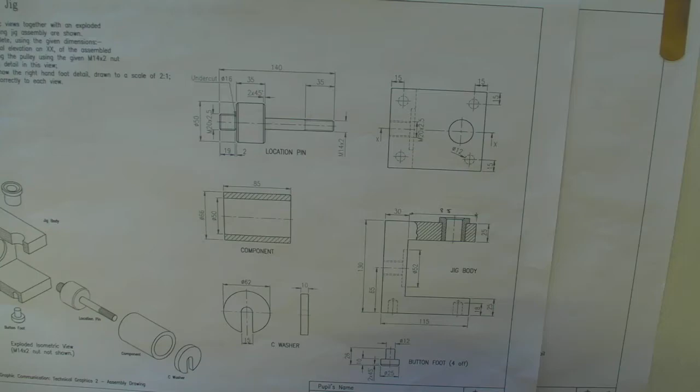Okay, B6, which is the drilling jig assembly. It's an assembly. We've got the washer, then we've got the component, the location pin, and that all fits inside the jig body. I'm going to start off by drawing, and I know it's a section, it's a sectional view

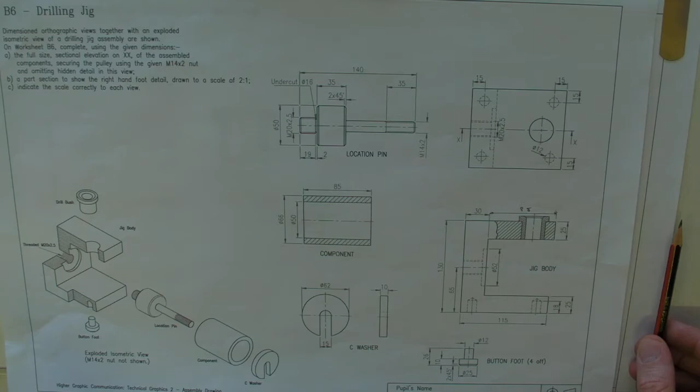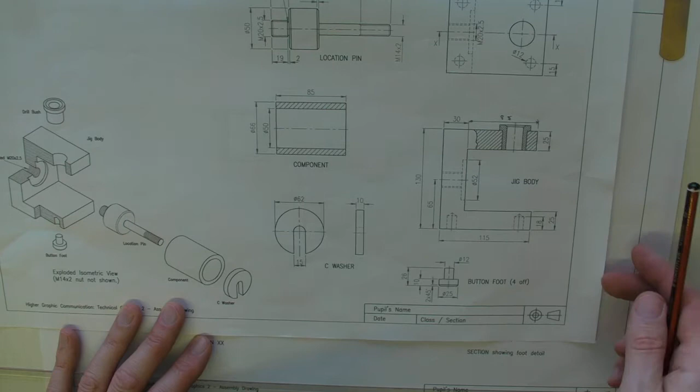Along XX, so we've got part of it been cut out. You can see the sectional information is here, so it's cut out across the top there. Okay, so we're going to be losing, basically slice right down the middle, but to be honest, when you're doing an assembly, the first thing to do really is do the assembly and then worry about the sectioning, because the shapes and everything are going to be pretty much the same.

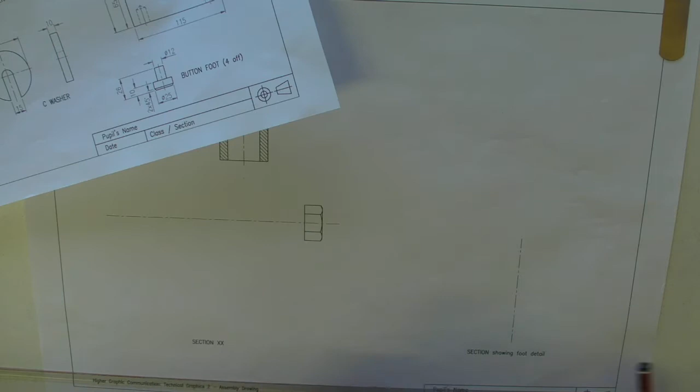Okay, so I'm going to start off, the best way of doing this is starting off at the nut here, starting with the washer. Everything's going to be centred around the centre line here. Now it says here that the washer's 10 wide, it's got a diameter of 62.

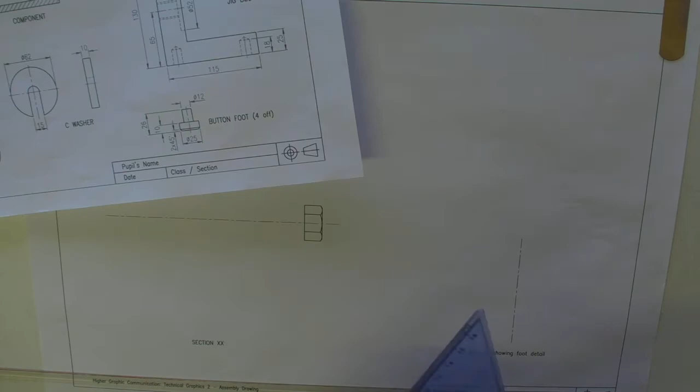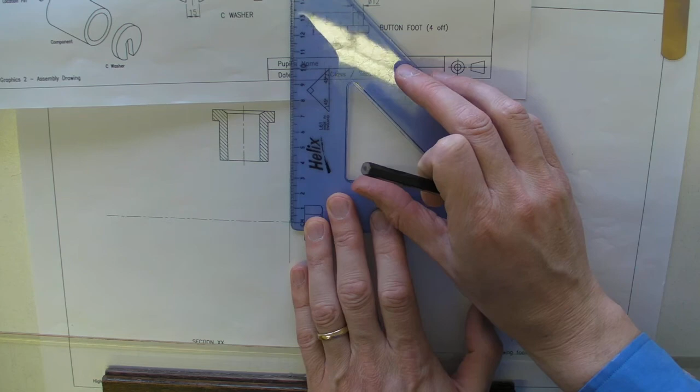Okay, so I'm just going to measure 10 along the line, mark a point here, and then project up from that. It's 62 in diameter, so that means that we're going to go up half of that, 31 on either side, so it goes up to there and then down to there. Okay, so just drawing the washer.

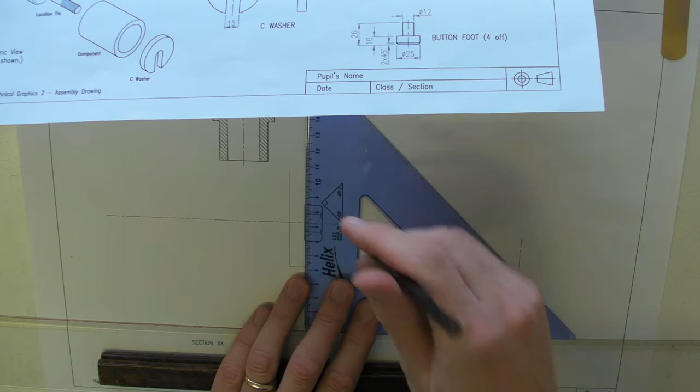As I said before, don't worry at this stage about hatching or anything like that, because I'm really not worrying about that too much. I'm just going to knock off these wee lines at the top here. I wouldn't normally do that, but I'm just going to do it just now to keep it tidy.

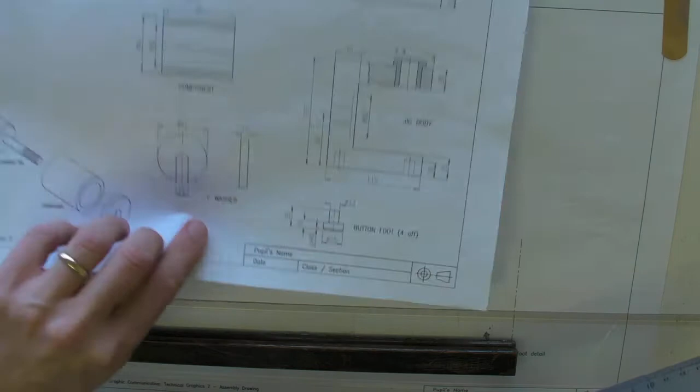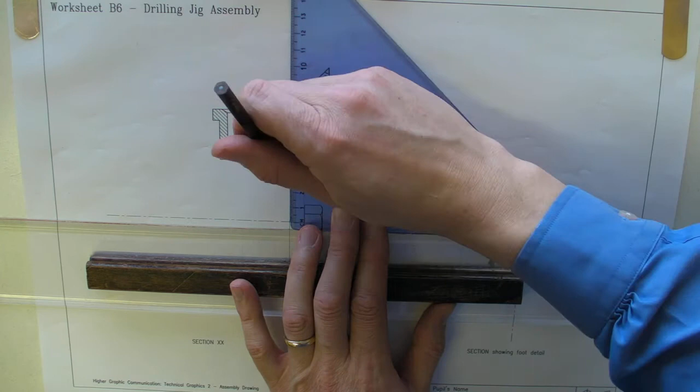So next comes the component, and it's 66 on the outside of it, so we're going to go up 33. I'll extend this line a wee bit - I should have just kept that line in, shouldn't I? So we're going to go up 33 here. That takes us to there, and then down 33 here.

That takes us to there, and this extends back by, let's have a look, 85, so we're going back 85. Down there.

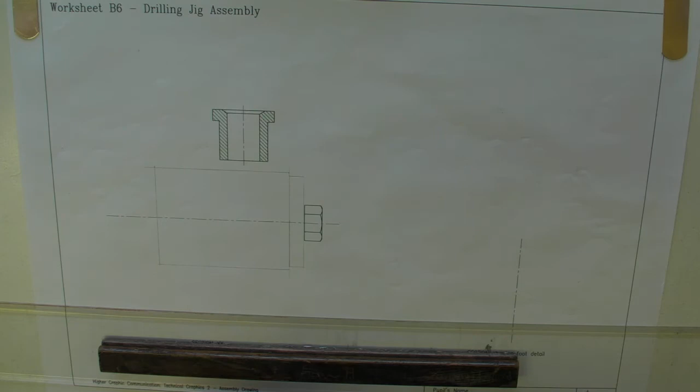Okay, so that's your basic shape, and then that's then pressing against the back of the jig body. Now I'll sort all that out in a minute. The inner part of this is 25, well, it's 50 total diameter, so mark a point 25, another point at 25 there. Okay, so that's the internals of that.

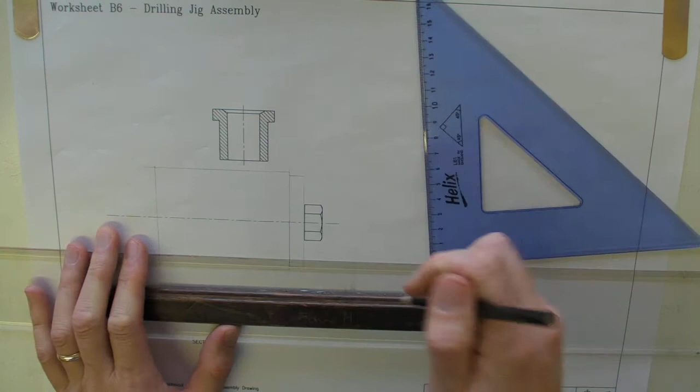There and there. You can also just building up the basic shape just now. So we've got the washer, then we've got the component, and then obviously on the inside of that we've got the locating pin as well, or a location pin.

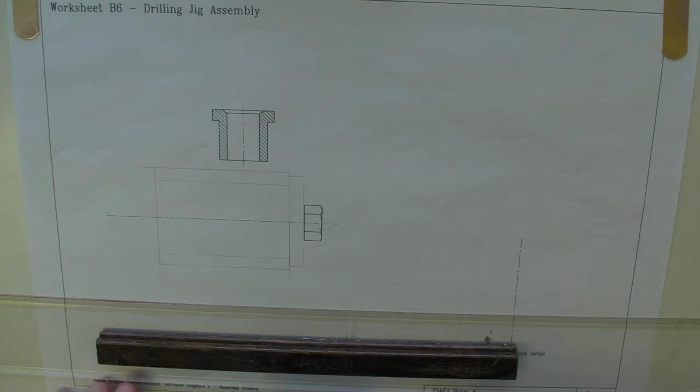But what I'm going to do is I'm going to draw up the jig body just now. So it's 30 wide, it's 130 in total. Okay, so I'm going to go back 30, because the component's going to be resting against this. So we'll go back 30, which takes us to there.

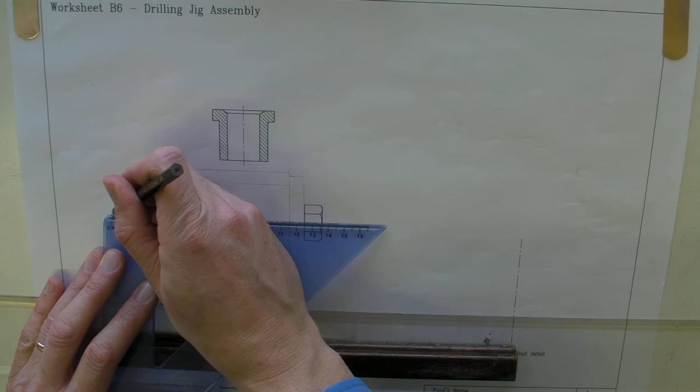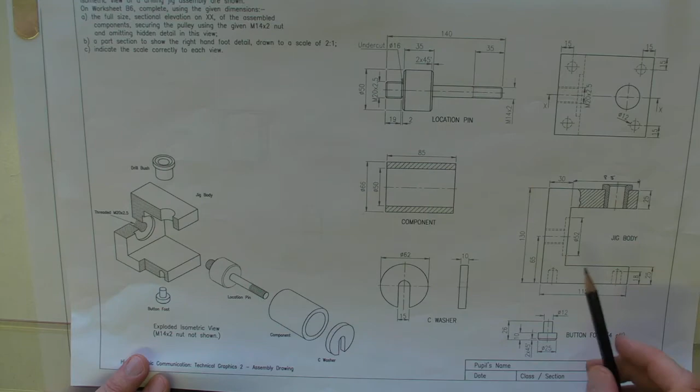And you can probably see from the way that the rest of it's going to work that the drill bush, which is the bit that goes in there - there's the drill bush, or the drill bushes on here. The top of that is going to have to locate with the top of the jig body. Well, you can actually see it there, can't you? So this has to locate inside there.

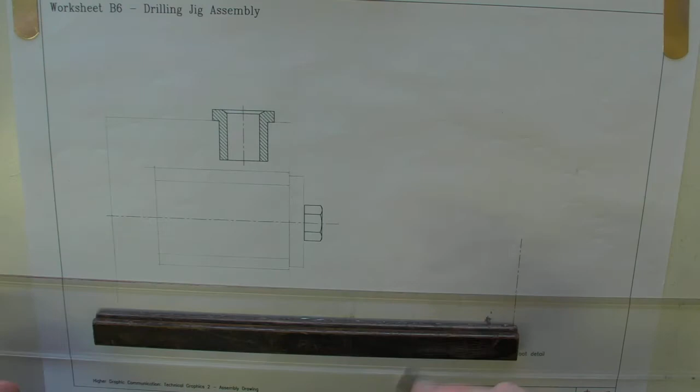So I'm just going to extend this back forward a wee bit there, and then back to there. I don't think it tells you anywhere, but the component fits exactly inside the jig body. Okay, so where the component stops is where this stops. Okay, so it goes to that point there.

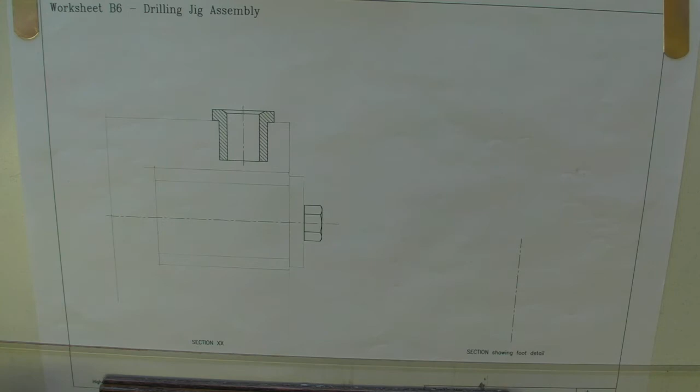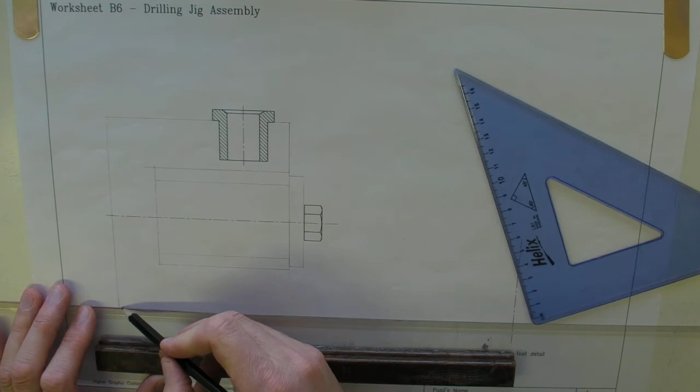Obviously that extends the same amount down the bottom because it's symmetrical, so I'm just going to measure this up with my compasses, measure that distance. I know that it's 130, so I know that it's 65, but you know, there's no point in making extra work for yourself by having to measure things when you can just use your compass. Okay, so that extends here, then that comes down there and stops. Okay, so that's the basic shape of that bit.

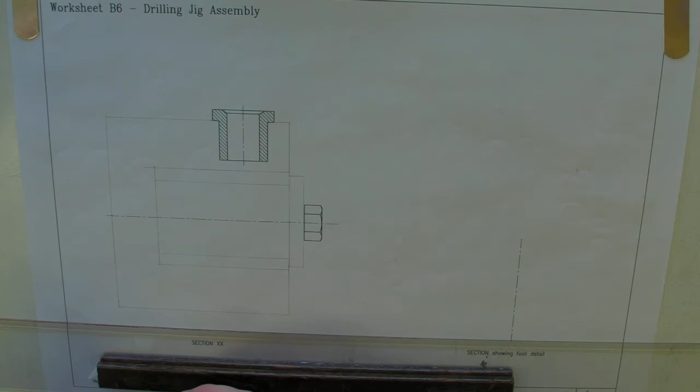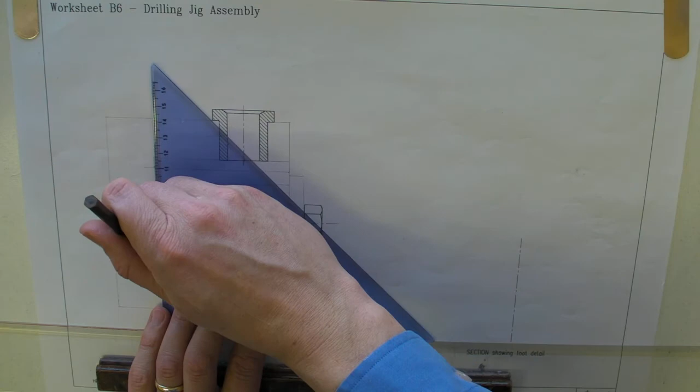Okay, there is actually, it goes also to the bottom of the bush, so it should actually come like that, and then like that. Okay, so just to make that clear, and that obviously will extend a wee bit further down here as well, so extend that bit further down and just measure. Try and make that a bit clearer in a minute for you.

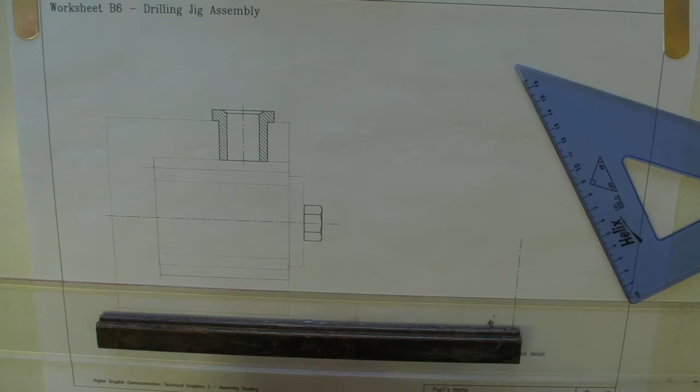So it extends to there, and that goes. So basically there is a bit of fresh air. So we just knock that out there, that line. There's a bit of fresh air in there between the two things. Okay, so I'm going to turn these lines in that I've got just now so you can see the shape a bit better, see what's going on.